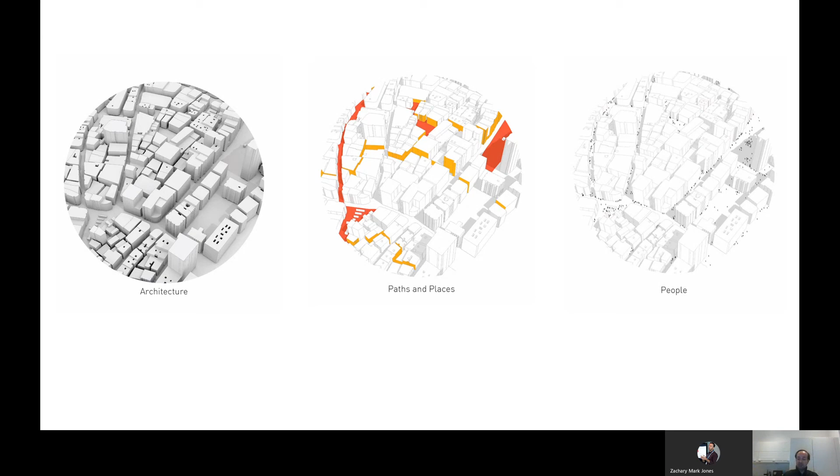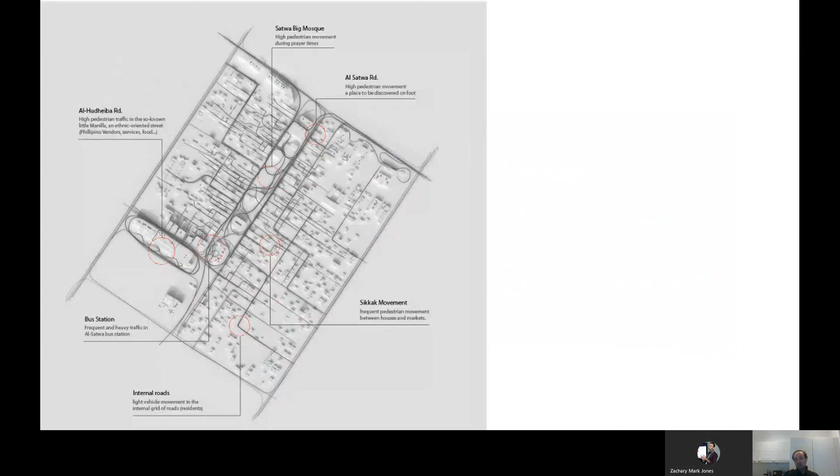If we look into the evolution of Dubai, three different elements changed through that evolution: we have the architecture and urban form, then we have the network system - the streets, configurations, and alleyways - and also what changed, the people and their interaction with the built environment. So not only did urban form change, but also human behavior and their interaction with the built environment also changed.

If we look into what happened to UAE's urbanism, the evolution of urban form with a particular focus on Dubai, we can look into this diagram which shows the growth of Dubai from 1968 to 2011: from a compact urban form in the 70s, then a period of suburban growth in the 80s, then suburban growth plus urban globalization or bigness, with massive signs of bigness and globalization after 2000.

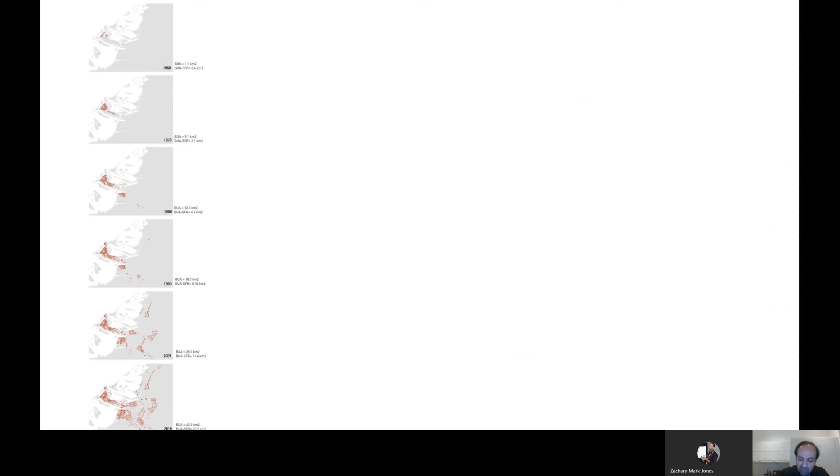The same happened to the city of Abu Dhabi, from a very compact urban form to a massive urban agglomeration that extends in the desert landscape and also in the Gulf Shore.

This diagram is a side by side that shows Dubai and Abu Dhabi, and the older landscapes are very dense and shown in solid red dots, while the faded red dots are the suburban communities.

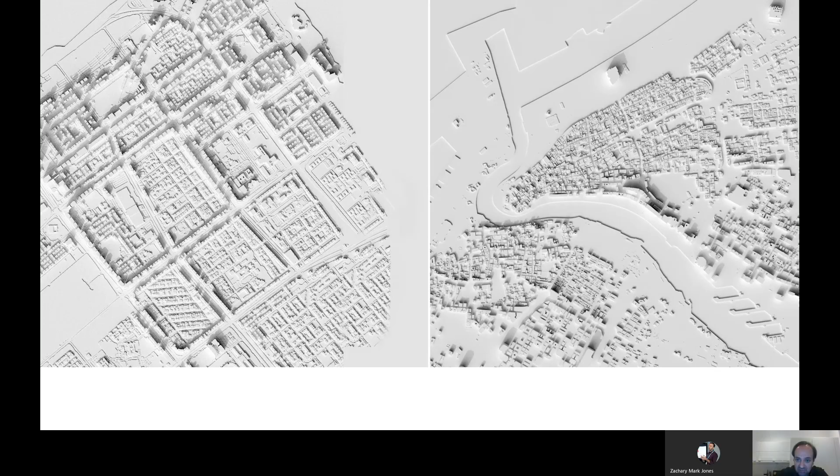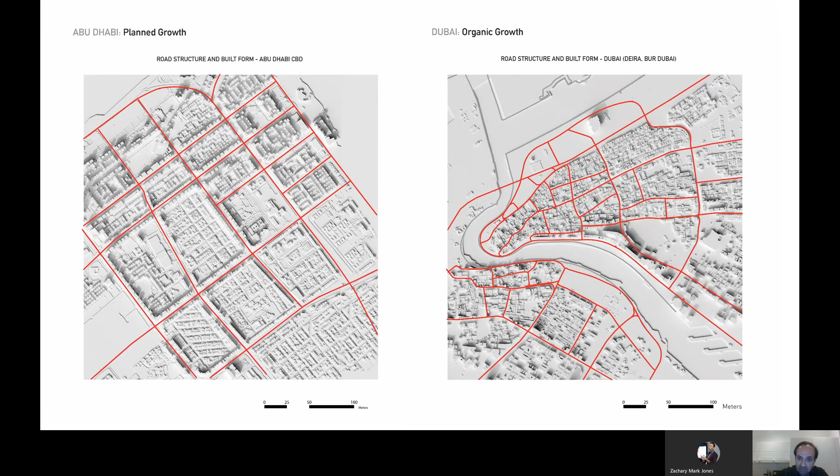This is also a side by side of two different typologies from the early 50s and late 60s of Abu Dhabi and Dubai - two completely different urban forms. One is very compact and organic, and the other is well structured and well planned. The two cities followed a very different ideology in city design, as we see here - one based on the grid system from its early inception, and the other very organic. So it's planned growth versus organic growth.

The evolution of Dubai is divided into three or four different phases, and we will see how the Expo 2020 fits within that.

We have the human scale, then we have dispersion, suburban growth, then we have bigness, and then we have beyond bigness. That's the period between 2007 and 2013 before the Expo appeared.

The human scale urban form, like in the 70s, stretches from the late 60s until the late 70s. Urban form was rich with visual variety, density, and very interconnected street systems.

Urbanism featured a human scale, a diverse system of land uses, high density, higher permeability, and compact urban forms that made it easy for people to get around and reach most of their destinations.

Unlike the landscape of bigness, where regulations and formalities usually control human movement, everyday urbanism in this human scale built environment of the late 60s and 70s is an outcome of natural instinct and desire that did not necessarily follow any formal programs or rules.

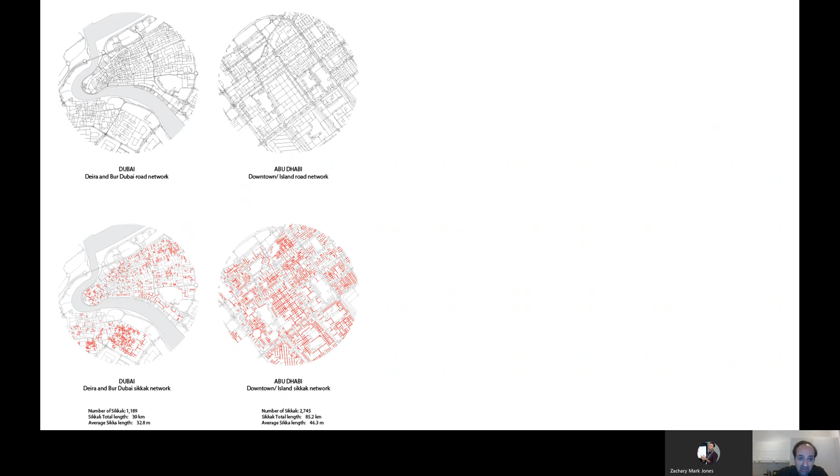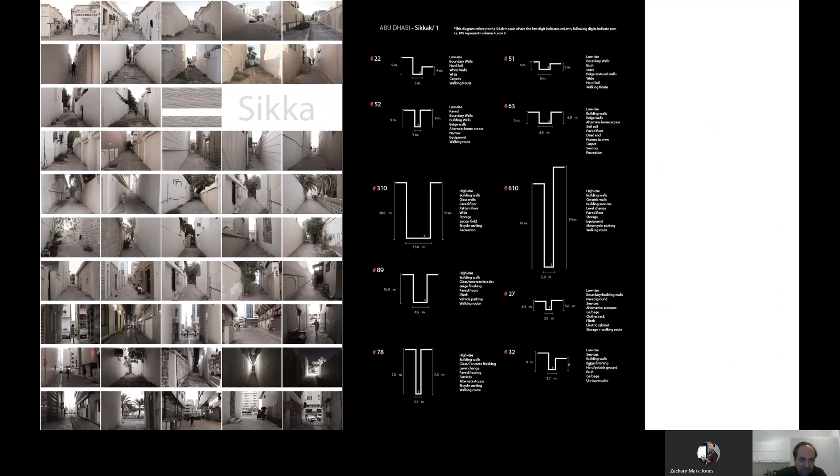After the human scale or compact development, we witnessed something called dispersion or planned suburban growth in the late 80s and early 1990s.

The compact urban form and dense urban fabrics were swamped by unstoppable growth of big suburbs. Segregated low density developments were booming around the region, and urban development shifted towards isolated, fragmented, single-use buildings, often surrounded by freeways and grade separated interchanges, and large open spaces that segregated people from one another and from the public realm and their daily needs.

This diagram shows the human scale on the upper line, and dispersion on the lower diagrams. We can see a comparative figure ground between the two - dispersion and human scale.

Since the late 1980s, we can see from the diagram that the land use system and the configuration of the built environment have completely changed.

Consolidated density blocks were replaced by super blocks. The buildings that once occupied the land parcels were moved to bigger parcels behind concrete fenced walls. Then mixed use developments were swapped by single uses, and interconnected streets were swapped with looping, curving cul-de-sacs. So the public realm lost its social content and was eradicated by sprawling suburban communities.

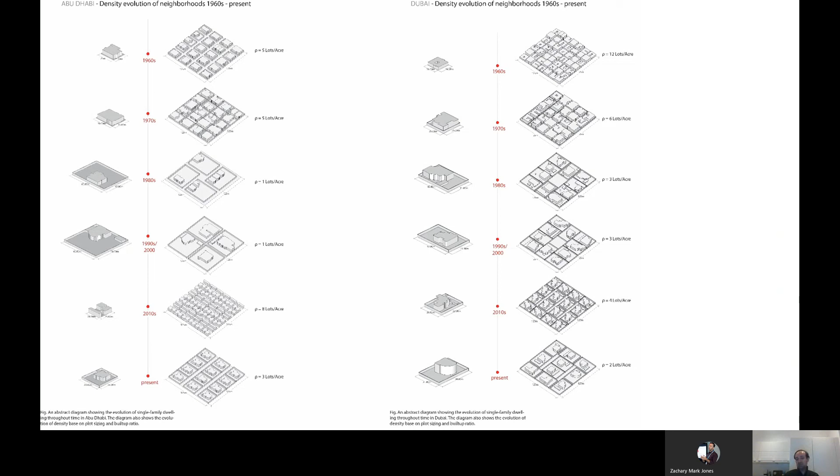Once 1 acre of land housed maybe 12 units or buildings, now 1 acre houses maybe 3 to 2 units per acre. This is a closer diagram showing how 1 acre in the human scale housed around 12 to 16 units per acre with mixed uses also.

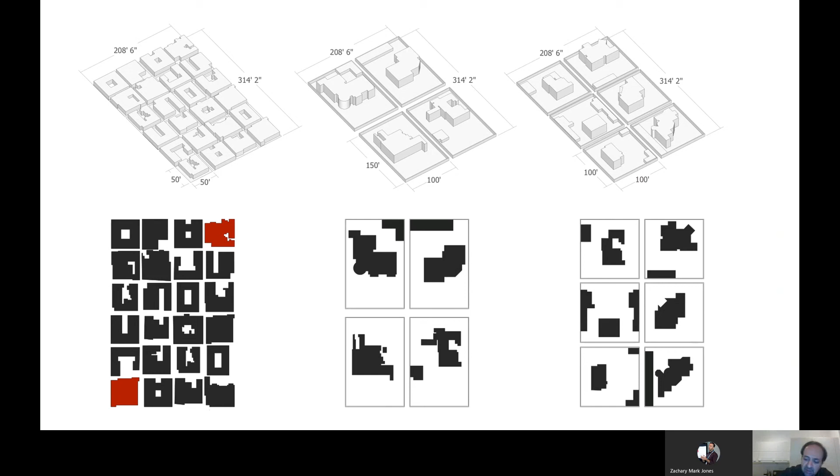In the dispersion, they housed maybe sometimes 4 units per acre, sometimes 6 units per acre, and other times 2 and even maybe 1 unit per acre.

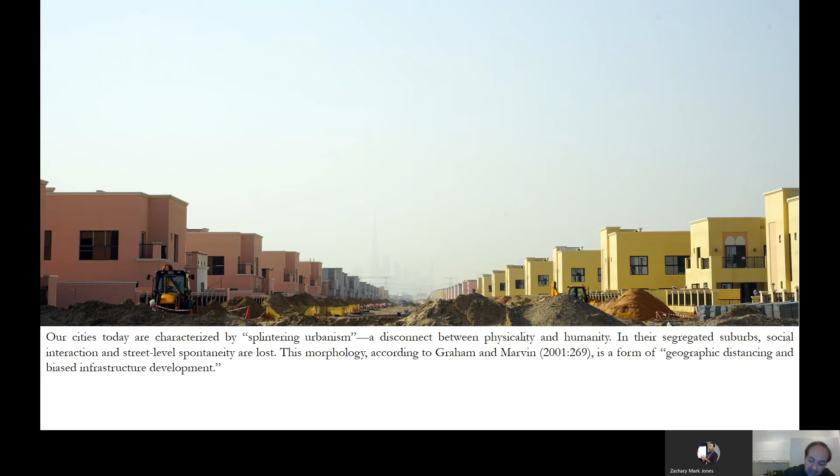So this diagram shows dispersion, and many argue that our region is characterized by splintering urbanism, a disconnect between physicality and humanity. This morphology, according to Graham and Marvin, is a form of geographic distancing and biased infrastructure development.

This picture shows infinite suburbs in Dubai, and the growth of suburban sprawl is a common reality. It's unstoppable, and the UAE and the Gulf region are not the only regions suffering from sprawl.

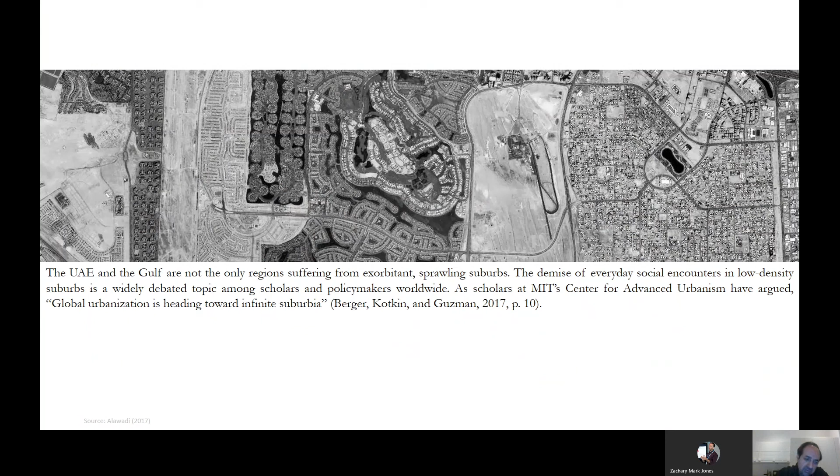The demise of everyday social encounters in low density suburbs is a widely debated topic, as scholars at MIT Center for Advanced Urbanism have argued. They said global urbanization is heading towards infinite suburbia, and this dispersion is the common reality for almost all large cities in the world.

The same for Abu Dhabi: in the older areas and the older built environment of the 70s, people can reach up to maybe 1,200 buildings, but in the suburbs, people can reach only around the same thing, like 0 to 200 buildings.

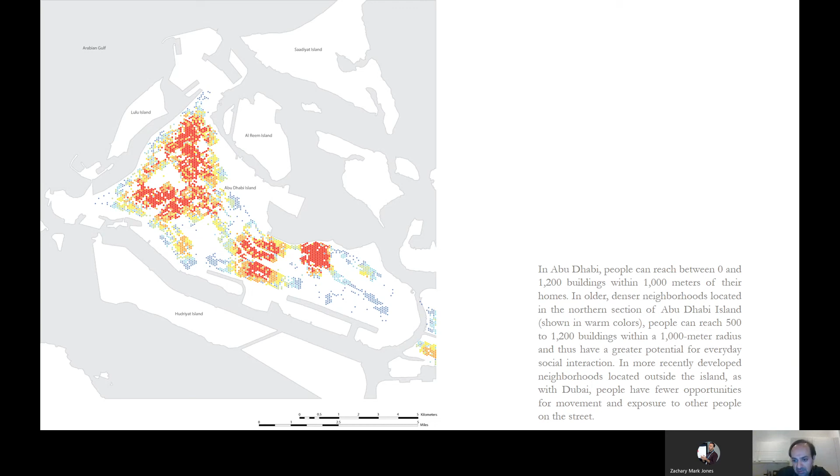So this research does not reject suburban development, but rather than condemning suburbia or trying to end its existence, it provides a route to improve them, or to rethink urbanism in the UAE.

So design and planning practice in the UAE need an overhaul, including an improved ideology of urban design. This research provides some insights to think about that.

So we had that, we talked about the human scale, then we talked about dispersion, then we have the third phase of Dubai's evolution as bigness.

In 2000, planning began to focus on neoliberalism. Planners enhanced the role of the private sector in city design and development. This model of urbanism embraces economic tolerance and bigness, including mega projects and spectacular architecture on a massive scale, all of which are overscaled and massively privatized.

The first approach to bigness in Dubai was building a new contemporary downtown area, a stretch of high rises along the highway that goes all the way from Abu Dhabi to Dubai. That was the start, and it began in the 1990s.

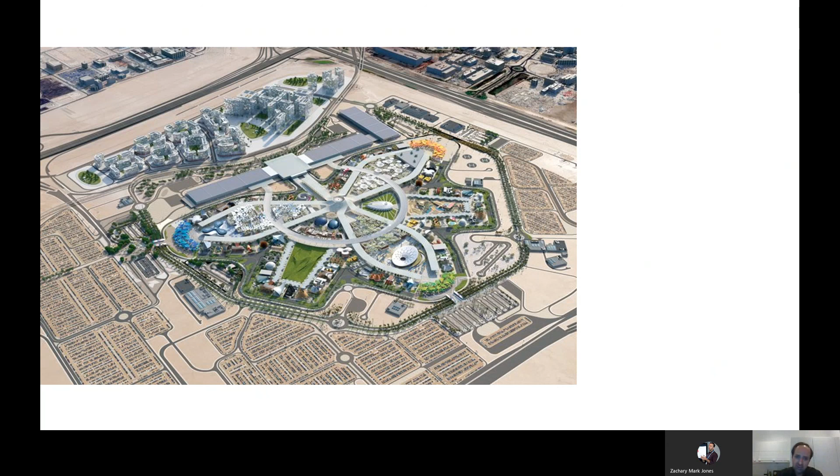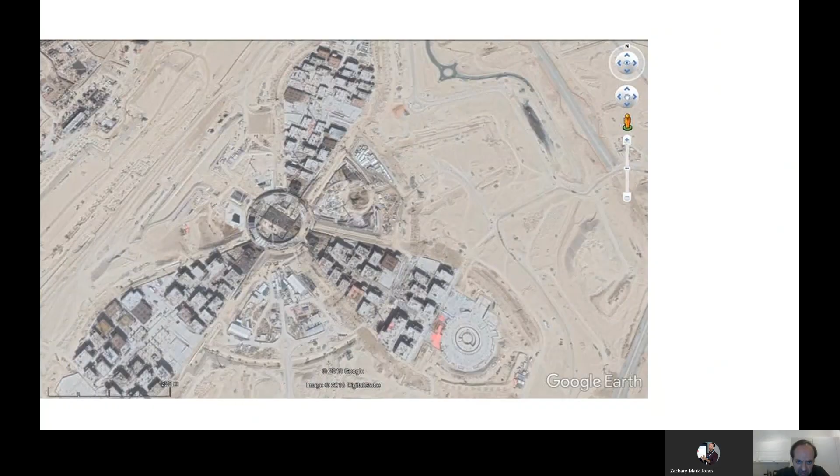This diagram shows the Expo site. The Expo site is a very small portion of the Dubai South development, placed at the intersection of the grade separated interchanges. This is the site a couple of years ago, this is the construction, and this is the Expo site now. It's just part of Dubai South development, a very small portion of it.

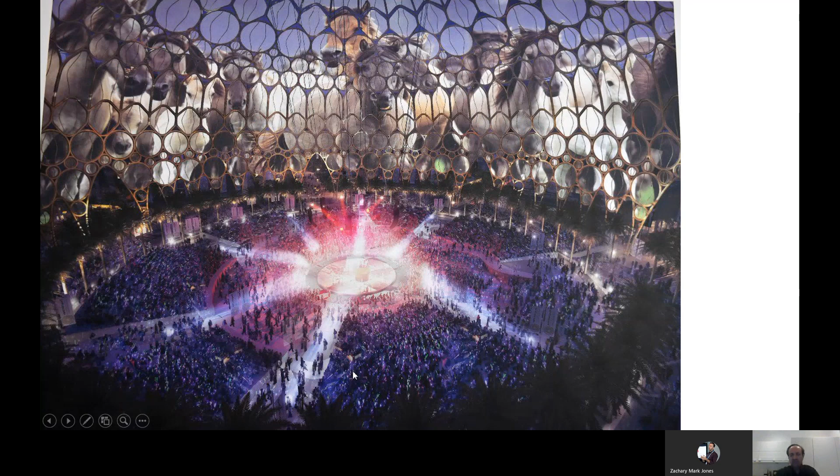These are some images of the Expo dome. And previously, present projects in the Expo site include Dubai Investment Park, Green Community, and all of these projects that have been there in the site before the announcement of Expo 2020.

Then we have the Dubai South project. It's a big master plan project. The total area of that is around 145 square kilometers, and Expo is only around 4.5 square kilometers, so it's a very small portion of the Dubai South project.

Dubai South project is expected to create around 500,000 jobs, and most of the projects in this site are redundant, very much similar to other gated communities and tower complexes in the city. So this is a diagram that shows Al Maktoum International Airport, the residential gated community, the exhibition district.

The Expo 2020, then you have the Golf District, the logistics district, and so on in Dubai South. And all of these projects, the Pulse, the Mag 5 Boulevard, are townhouses, serviced apartments, hotels, shopping malls, served by golf courses, massive landscapes, and they are highly privatized. They are very much carbon copies of other gated communities in Dubai.

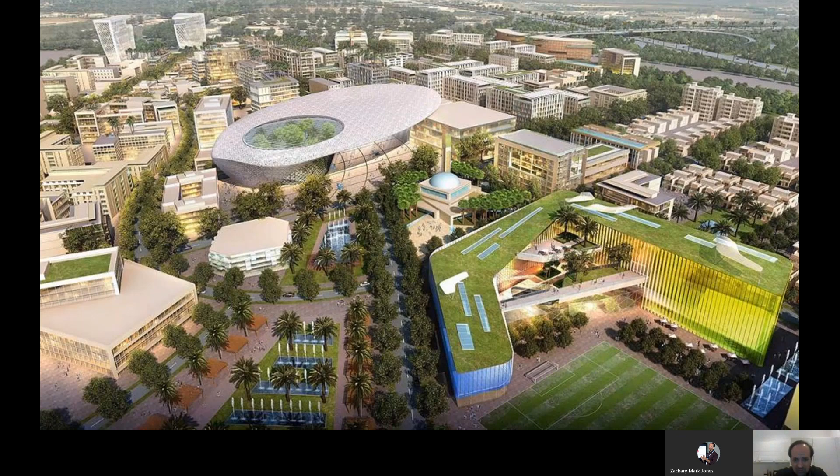So the entire Dubai South itself is not unique in terms of its development. It's very similar to any other kind of development in the city once it comes to its housing fabric. Here, other projects like Parkland Residence, Parkland Townhouses, the villages, Dubai Investment Parks, and so on are all similar projects. Even you can tell from the renderings that are very similar to other projects.

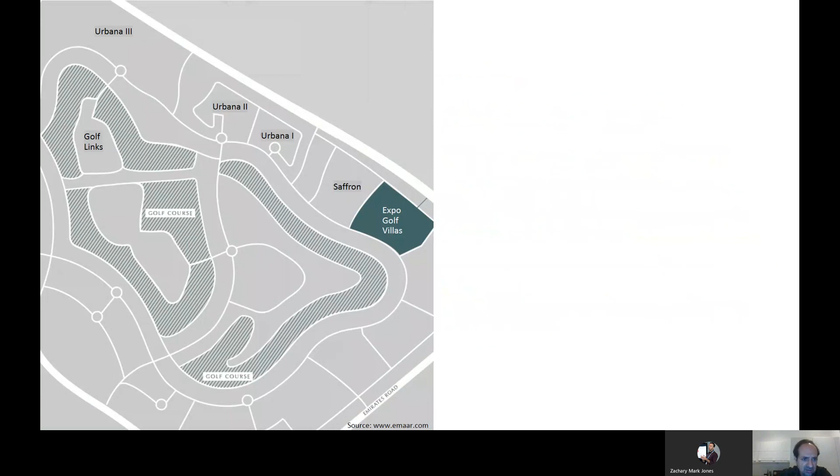Emaar South is another gated community within Dubai South, still similar, the same theme of gated communities with townhouses and villas. This is just one example, renderings of all of these high-end projects, and this is just one master plan in the vicinity of Expo. This is under construction, with different housing projects coming up.

So in terms of urban form, the built structure of Dubai South that hosts Expo 2020 is very similar to any other part in Dubai, characterized by bigness. The developments are themed, privatized, the density is very low, the street systems are curvy, looping, disconnected, and developments were planned as if they are private islands. There is no integration between them in Dubai South, so they are fragmented. Everyone works on its own without connection to the other development.

The good thing about the Expo site is the expansion of Dubai's metro. Dubai Metro started the expansion process. The new line, Expo 2020 line, is 15 kilometers with 7 stations, including 2 underground. It starts from the Nakheel Harbor and extends all the way to the Expo site and also to Al Maktoum Airport, so it has the potential to connect the 2 airports of Dubai.

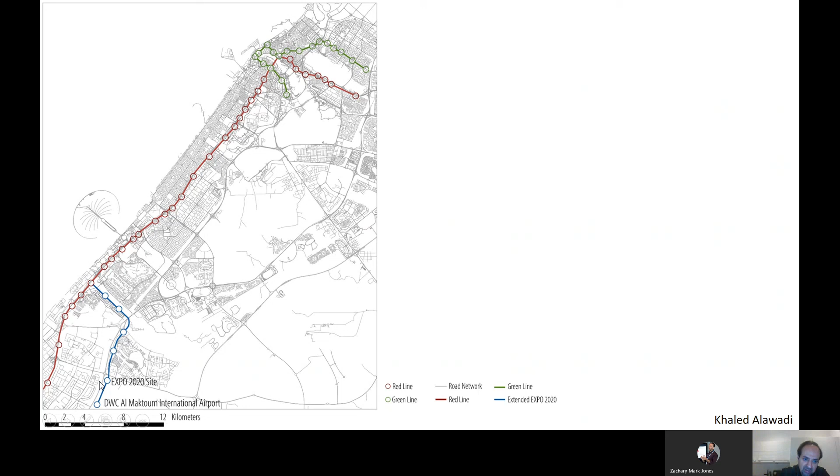So this is the Dubai map, the existing green line, the existing red line, and then here we have the blue line that connects the red line to the Dubai Expo site and to Al Maktoum International Airport, connecting all the way the Expo and the airport also to the other airport in the city. This is before construction of the line, and here we can see the extension of the line. The line is almost completed now, and it passes through this one development that is very dense.

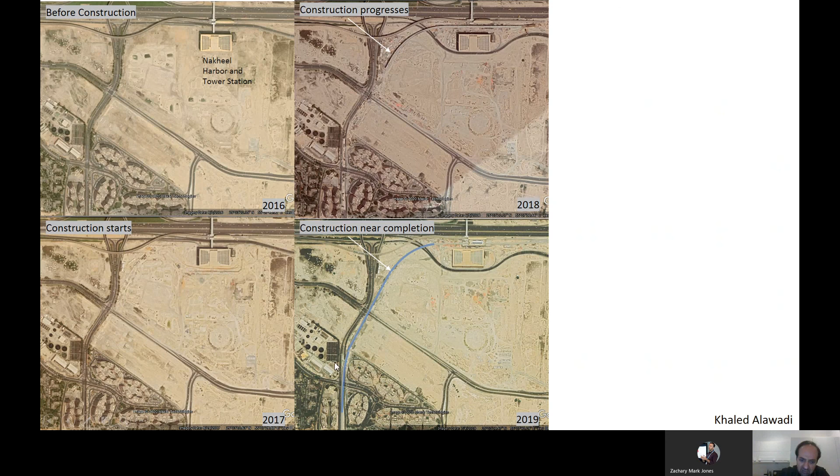So we talked about the evolution of Dubai and its three different phases: the human scale, the dispersion and suburban growth, then bigness and the Expo 2020. But there is an interesting period of Dubai's urban growth that is not well documented in the literature, which I call beyond bigness. This period is between 2008 and 2013, between the economic crisis and the time Dubai won the bid for Expo 2020.

So I call it beyond bigness, the quotidian landscape. While bigness outshone and dwarfed the human scale landscape in the early 2000s, urban scholars and architects have admired and advocated the old ideals of urban design.

Since 2008, something new emerged in Dubai, called the demolish-rebuild era. Between 2008 and before the Expo, the city started looking at traditional neighborhoods in the central city to swap them with high-end projects. Gentrification happened for the first time in Dubai at a very big scale. Due to the economic crisis, Dubai stopped building on vacant lands, and instead began demolishing traditional neighborhoods to replace them with high-end projects. That was between 2008 and 2013.

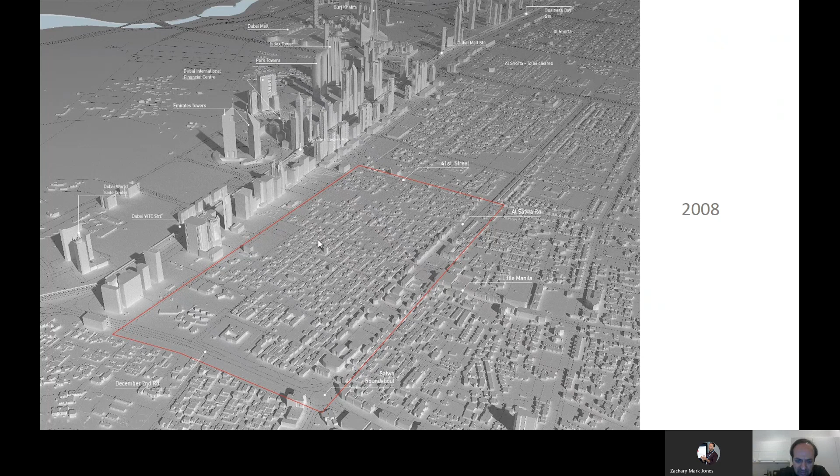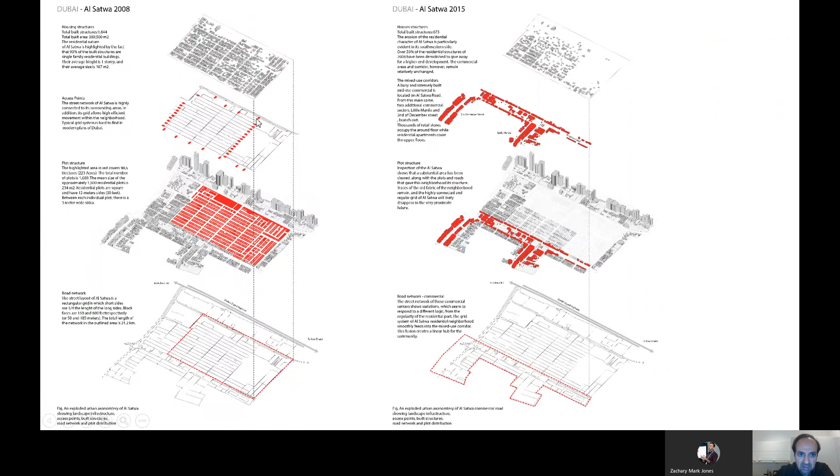We can see here what happened in 2015. Most of the buildings were demolished. Here we can see the figure ground of 2008 and 2015. Here we can see a detailed morphological mapping of the area between 2008 and 2015, and the footprints, the difference between them. And this is now, most of these neighborhoods are gone.

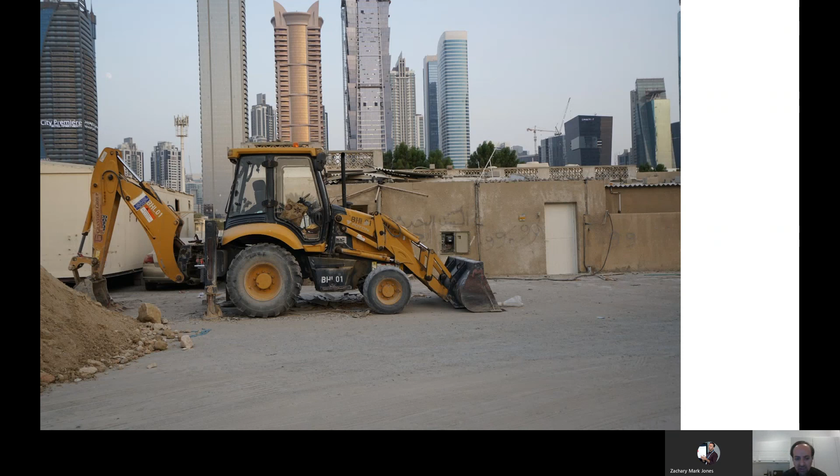So Dubai lost a lot of its central fabric due to the economic crisis of 2008. Then when the city won the Expo 2020 in 2013-14, the trend of urbanism went back to normal, to claiming vacant lands for development, but not centrally located lands.

So to wrap up this presentation, which urban design is in search for the human scale?

This work does not suggest completely leaving bigness behind or low density suburbs. Its argument instead is that professionals and scholars in the UAE must rethink urbanism, because the exclusive focus on bigness led to an urban design that is rigid and monotonous. Current forms of urbanism and architecture remain where they were 22 years ago. We have seen no new interventions or physical ideals to inform new generations of urbanism. Bigness, with its rapid pace, homogeneous and dispersed form and exclusive nature, continues to dominate.

Urban design in the UAE no longer addresses the needs of the people at the eye level or the human scale, but instead it is caught up in an endless, unending race to construct the tallest and biggest in record time.

Bigness will continue to flourish in the region. Bigness is inevitable. It's an integral part of the region's goals for economic growth. But economic strategies should not dwarf environmental stewardship and social benefits. Designers and planners must acknowledge all three factors equally and come up with context relevant ideas and practical compromises.